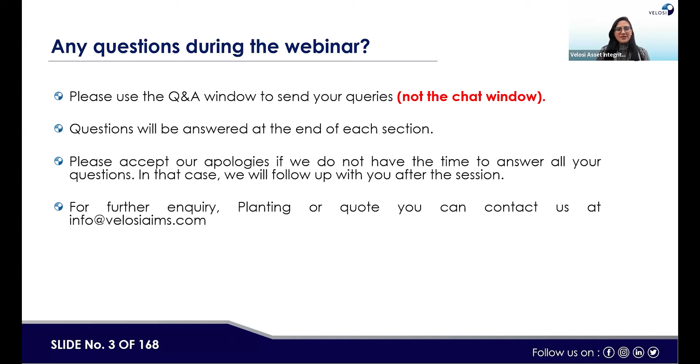Since this is a quite technical subject, we will touch only the key theoretical and practical aspects of conducting FFS and life extension study of thermal cyclic service piping system. In this limited 2 hours, we request you all to follow along with us and keep asking questions to help us make this session as engaging as possible.

So we will be covering Velosi introduction, fitness for service details, standards and regulations for this topic, case study overview, and question and answers. So let us begin, and I will start with Velosi introduction.

Velosi is a leading global consultancy firm that provides asset integrity, HSE, engineering, environmental, and software solutions to clients in oil and gas, power, and petrochemical industries around the world. We also have our in-house proprietary software, Whale Plant, which is an industry-leading SAP certified complete asset integrity software suite currently being used by oil and gas and energy giants such as ADNOC, Dragon Oil, TANAP, Emirates Nuclear, BSR, etc.

Founded in 1982 in Malaysia, Velosi Group was then acquired by Applus Spain in 2011. We have 43 plus years of experience so far, and our footprints are in more than 86 countries. So far, we have completed more than 1,300 projects with 500 plus multiple clients worldwide.

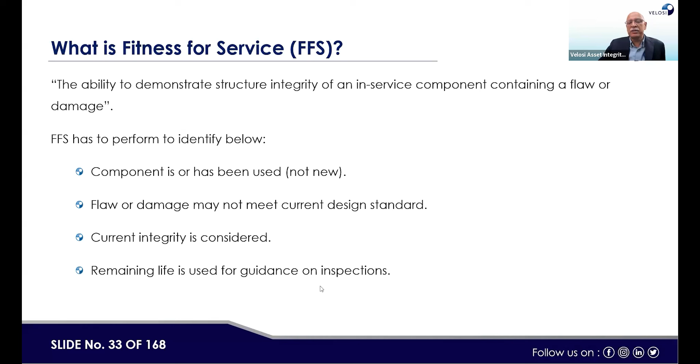So the ability to demonstrate structural integrity of an in-service component containing damage is called FFS. FFS is performed to identify that a component is or has been used, not new. Flaw or damage may not meet current design standards. Current integrity is considered, and remaining life is used for guidance on inspection, repair, or replacement decisions.

Background: this process started in 1990 with a joint industry project in America, where the first FFS guidelines were prepared. Then in 2000, the first edition of API 579 was released. In 2007, ASME and API joined hands and started working together. The third edition was published in June 2016, and the current edition being used by professionals was released in 2021.

This is just history. Now, roles of different codes and standards: API 579 does not work in isolation. All applicable design codes apply, for example ASME division 8, ASME section 8 division 1, 2 and 3, then ASME section 2, 3, 4, and 9. Similarly, ASME B31.3, B31.4, B31.8, and API 650, API 620 for tanks. So all these standards play their role, and accordingly the relevant standards are selected while making the assessment.

Then other relevant codes like inspection or corrosion standards apply, such as API 571 for identification of damage mechanisms, and API 570, API 510, API 653 for inspection and code compliance checks. Similarly, API 576 for PSVs. All these standards are required to be used while doing FFS assessment per the applicable equipment or component for which those equipments were built.

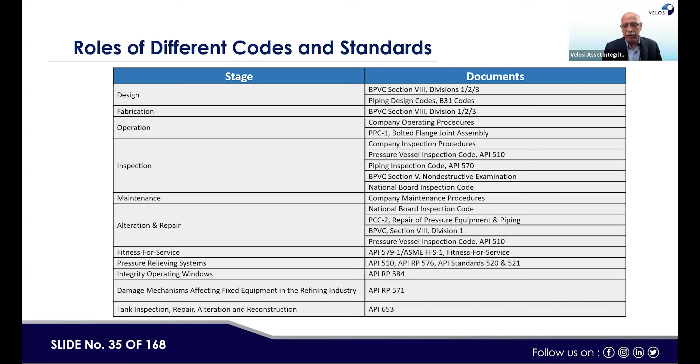Now, the objective of fitness for service assessment is to get some time so we can either repair or replace the equipment, or continue for a certain period without any action. The objective arises because equipment is found with a defect, and accordingly we do the assessment. The final outcome of FFS assessment is a decision to run as is, repair, re-rate, alter, or retire the equipment. The FFS result can also include an estimate of remnant life, useful for planning future inspection in case of continued running, and future budgeting in case of equipment retiring.

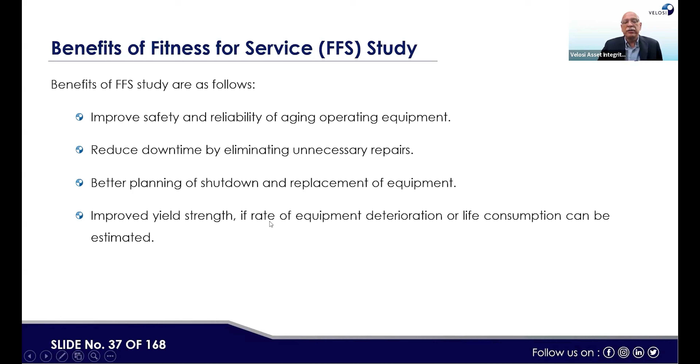Next, the benefit: previously, if equipment was not meeting the criteria of static equipment under API 510, 570, or 653, it should be removed, retired, or repaired. But since the inception of API 579, we can get some time. This ensures safety even though the equipment is in a defect situation, improves safety and reliability of aging operating equipment, reduces downtime by eliminating unnecessary repairs, enables better planning of shutdown and replacement, and allows estimation of the rate of equipment deterioration or life consumption.

Which areas or expertise are required? It is a multidisciplinary team that should be doing the FFS assessment job. For example, corrosion experts and corrosion engineers are required. Plant operational experience or operation engineers are required to be involved. Stress analysis means good mechanical engineering design; people who can do stress analysis and finite element analysis are required to participate, as well as fracture mechanics expertise. Metallurgical and material engineering knowledge is also required.

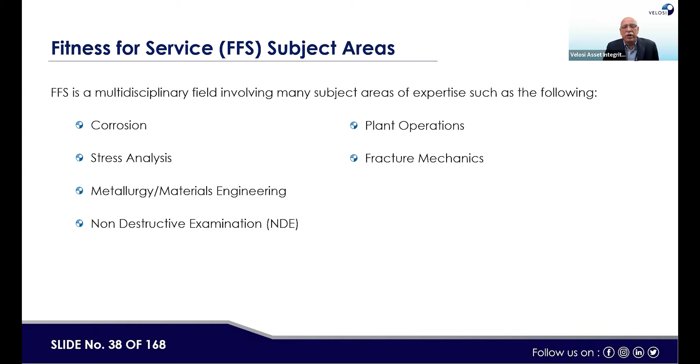Then non-destructive examination experience, NDE, like what kind of techniques are used to do defect assessment or equipment condition assessment. Just for the sake of knowledge, when we talk about API 579, this standard consists of 14 parts. Part 1 is introduction, and the last part is fatigue damage. In between, for example, brittle fracture is section number 3.

So practically part 1 and 2 are the introductory parts, and 12 parts are for various kinds of damages. For example, brittle fracture is part 3, general metal loss is part 4, localized metal loss is part 5, pitting is part 6. So 4, 5, 6 are similar kinds of damage mechanisms.

Brittle fracture mainly is like UCS 66, or low temperature service checks are done by this. Then blister, HIC and SOHIC damage is part 7, weld misalignment and shell distortions is part 8, crack-like flaws is part 9, equipment operating in creep range is basically chapter 10, fire damage is part 11, dents, gouges and dent-gouge combinations is part 12, laminations is part 13, and fatigue damage is part 14, which we will be using in today's assessment.

Then there are various annexures which provide support to the applicable parts. I'm not going through this because this is available there.

Then if we see the combination, how these parts are combined together is interesting. Brittle fracture works in combination of part 3 and 9. Corrosion and erosion issues are covered under the combination of part 4, part 5, part 6, and part 7. Then crack-like flaws are basically covered under part 9.

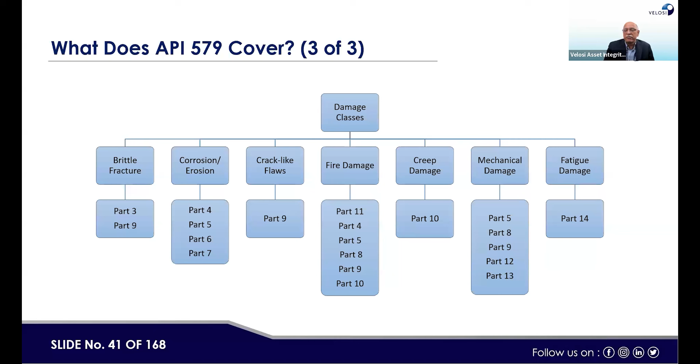Fire damage is a combination of part 11, 4, 5, 8, 9, and 10. Creep damage is part 10. Mechanical damage is part 5, 8, 9, 12, and 13. Fatigue damage is part 14 alone, and it also goes with ASME 8, division 2, fatigue and finite element analysis as well.

So now, in each chapter, there are 3 levels of assessment. Level 1 is very simple. Level 2 is moderate. And level 3 is complex and advanced, which is done with the help of finite element analysis software.

There could be any software, but it should be able to do fracture mechanics and finite element analysis or stress analysis. Whereas the simple one, level 1, is a spreadsheet. Level 2 is more than the simple one, more moderate, but it is also done via Excel spreadsheet.

So now, how do we do this? First of all, the defect is identified and its size is identified. Then we say what is the flaw and what is the cause of this flaw or damage. Then which technique can be used for the assessment of this defect, and accordingly, what is the applicability of that particular chapter or part, and what are the limitations while doing this assessment.

Then what kind of data we need - this is step 3. Then assessment technique and acceptance criteria - whether we'll be using a spreadsheet, whether we will be using software, whether it would be an elastic-plastic technique or some other technique, or a limit load technique.

Similarly, step 5 is remaining life evaluation, which is also part of the study. Remediation action, or what recommendations are required to keep the system intact, or what cautions are to be taken by the operating company. Then what kind of in-service requirements and recommendations are given, and then the report is prepared - what's called documentation. So a total of 8 steps are generally taken for any FFS assessment.

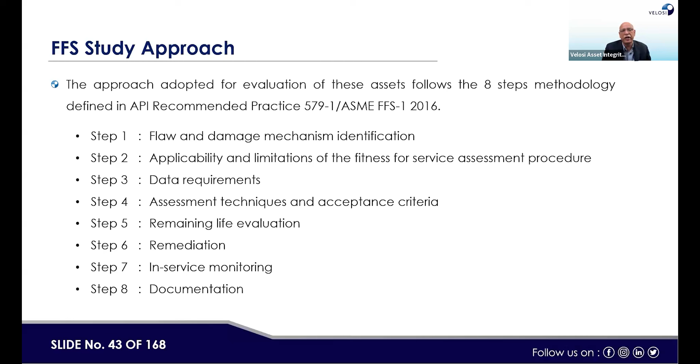Then the importance of damage mechanism - this is like we say, if some defect is created or seen in the equipment, we need to understand how this defect was caused. Like what was the damage mechanism behind it, and what could be the failure mode next to cause this equipment to fail, and what could be the consequences.

At the same time, for example, if we want to do FFS assessment for any defect, we need to first understand - the current defect growth rate should be either known or should be prevented. Unless and until the damage mechanism is kept in control or its growth rate is known, we will not be able to guarantee how long the equipment can be kept under operation without any threat of failure.

So the identification of damage mechanisms, its causes, and its prevention measures should be known to the FFS team. Then they can make proper decisions. This means that API 579, or API 571, or applicable NACE standards, or any other relevant reference should be kept in hand while doing FFS assessment.

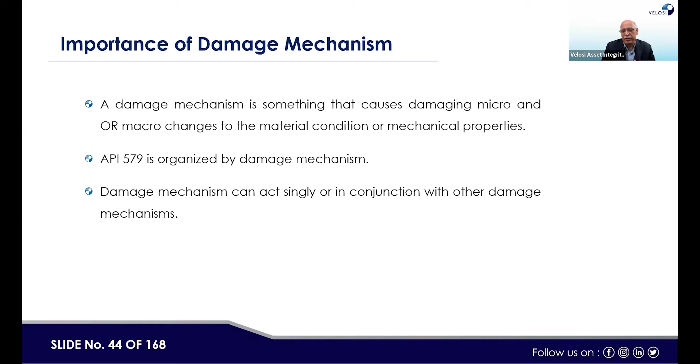Now, there are various kinds of damage mechanisms. If you want a little idea: mechanical, temperature-related, corrosion-related. What are mechanical related? For example, overload, brittle fracture, ductile tearing, deformation or buckling.

Then wear is sliding, fretting, or abrasion related damage. Then fatigue is low cycle, high cycle fatigue, thermal-mechanical fatigue, or erosion is also sometimes considered under fatigue. Then temperature-related issues mean creep rupture, deformation, microstructural degradation, temper embrittlement, over-aging, then oxidation, and so on.

Then in corrosion, low temperature corrosion and high temperature corrosion are all part of these corrosion issues. Like if you see brittle fracture, there's no deformation, but the equipment could be broken because of lack of toughness due to low temperature.

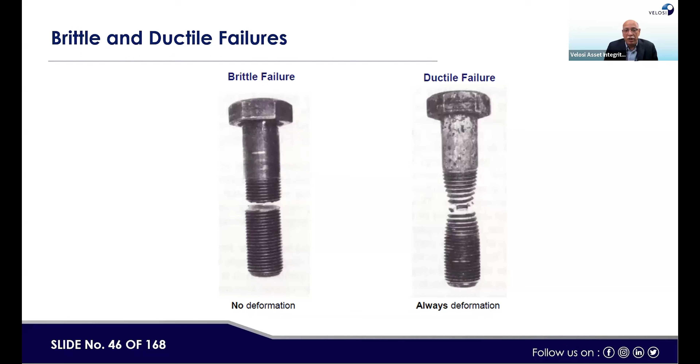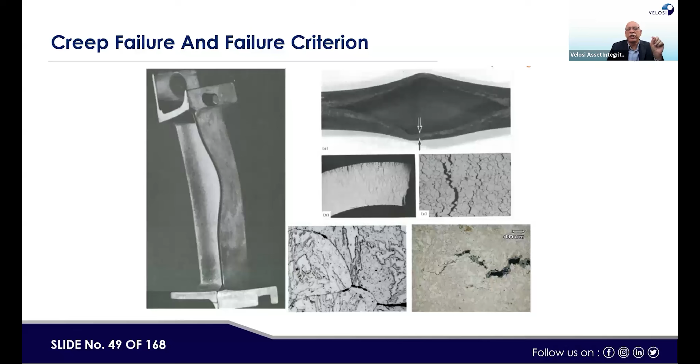Then creep failure, which is basically due to high temperature runs. If equipment, for example a fired heater or reactor tubes, is exposed to excessive temperature variations beyond its limits, it can fail due to creep or high temperature cycles. Then initiation of fatigue cracks, generally due to mechanical fatigue from thermal cycles or vibrational cycles.

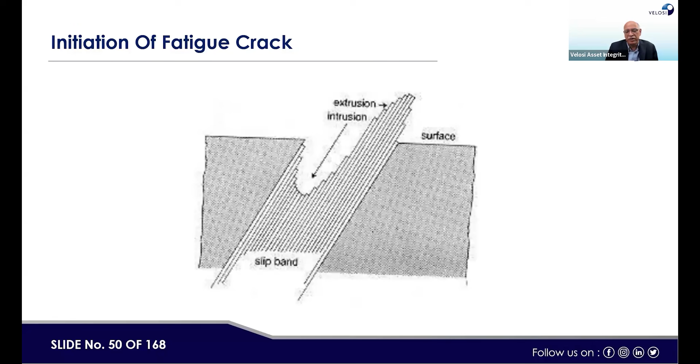Then metal loss, which is normal corrosion, can be seen by naked eye or measured by UT. Based on the metal loss recurring rate, assessment can be done. This is metal loss from pitting - if localized pitting is there, internal or external, it can also be assessed.

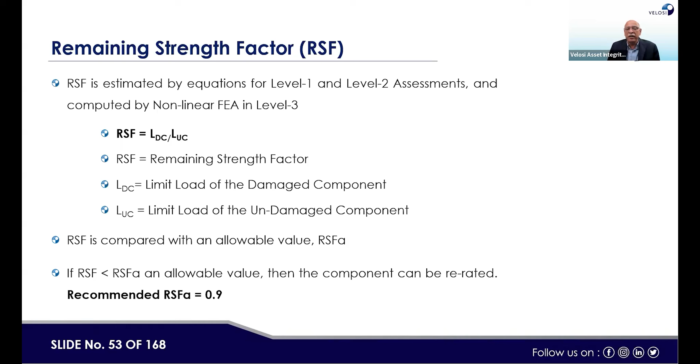Then there's an important aspect covered under FFS assessment level 1 and level 2, called RSF, remaining strength factor, which is LDC over LUC. LDC is limit load of the damaged equipment, LUC is limit load of the undamaged equipment. If RSF is greater than 0.9, equipment can be considered fit. If less than 0.9, it is considered not fit or equipment has to be re-rated.

From an application point of view, on which kind of equipment or geometrical shape FFS-579 can be used: cylindrical, spherical, formed heads, pipe bends - usually classified as primary equipment, these are type A components. Then type B components like nozzles, piping systems, reinforced zones of conical transitions, integral tube sheet connections, flanges, cylinder to flat head junctions, usually classified as secondary components.

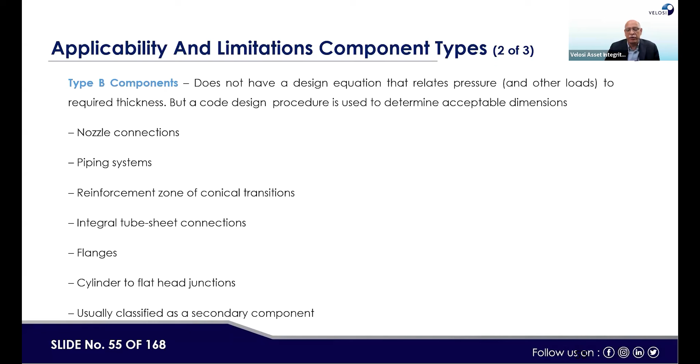Then type C components - these do not have a design equation, so no pressure equation can be used and thickness cannot be calculated, nor can code design be applied. For example, pressure vessel head to shell junctions, stiffening rings attached to the shell, skirt and lug type supports on the pressure vessel, tank shell courses to tank bottom junctions.

So here we have to use some other empirical equation for the FFS aspects - we have to keep this in mind. API 579 is applied only on the pressure containing part. Non-pressure containing parts like structures are considered not applicable for API 579.

Then applicability and limitation of level 1 and level 2 procedures: the original design criteria was in accordance with a recognized code or standard. The region of metal loss has relatively smooth contours without notches and is away from structural discontinuities. What is structural discontinuity? From any particular nozzle, from any major T-joint, or wherever structural discontinuity occurs - this defect should be away from such areas.

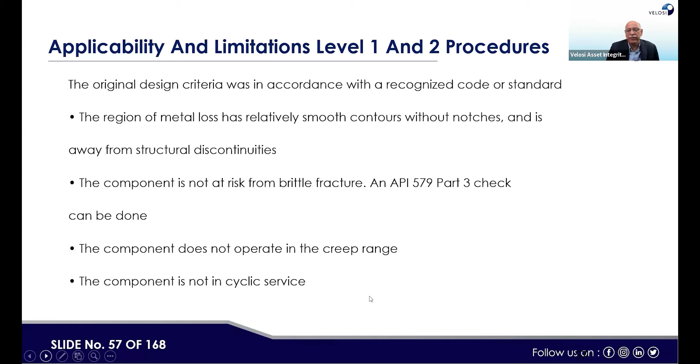For 579, if there is structural discontinuity nearby, or cyclic service, or secondary stresses coming on the equipment, then level 1 and level 2 normally cannot be applied. The region should be away from structural discontinuity, the component should not be at risk from brittle fracture (API 579 part 3 check can be done), the component should not operate in the creep range of temperature, and should not be in cyclic service - these are the limitations where level 1 and level 2 do not work.

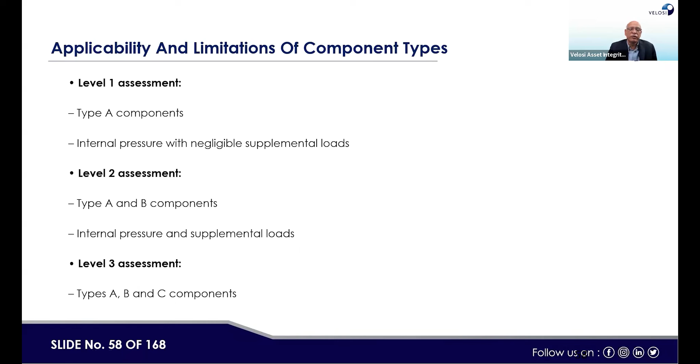Level 1 normally applies to type A components with internal pressure and negligible supplementary loads. Level 2 assessment covers type A and B components with internal pressure and supplementary loads. Type A, B, and C components, all kinds of conditions, can be covered under level 3, because it is finite element analysis based, with a lot of calculations done based on applicable empirical equations.

So now what kind of data do we normally need? Original equipment design - like the data sheet, design calculations - we need that. Then equipment inspection and maintenance history. We also need, if a defect is there, its size and dimensions.

And then if there has been any kind of risk assessment like RBI done, or previous corrosion study or RCA report results, those can all be used as good reference data for the FFS assessment. Here you can see one example of a defect where metal loss is shown outside - the grid is shown: pressure vessel shell, inspection grid, metal loss.

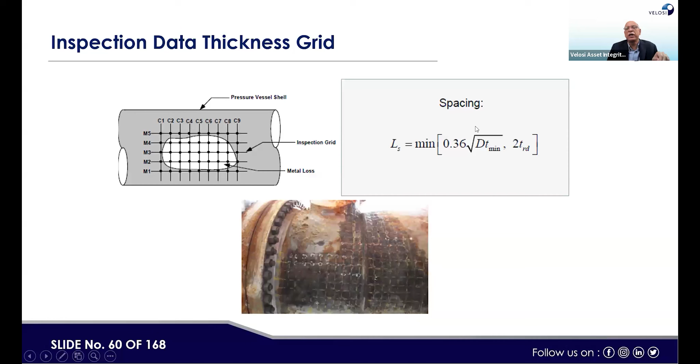So in all these boxes, metal loss is not equal. Maybe in the middle there is the highest metal loss, and in the edge there could be less metal loss. That's why this equipment is divided into cells, and each cell is given the thickness which is the average thickness of that part, keeping the worst metal loss there. Accordingly, there's a spacing, and assessment is done based on these calculations.

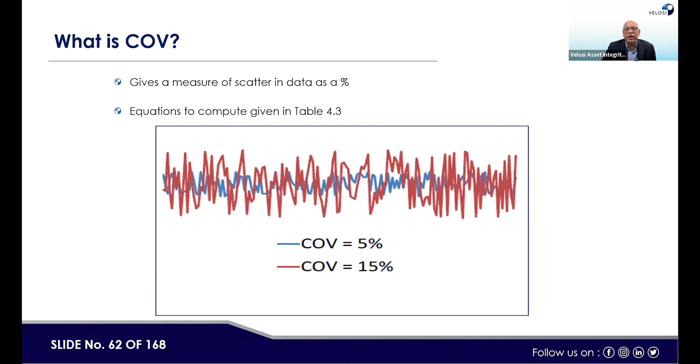This method should be applied if metal loss is general, minimum of 15 readings required. Coefficient of variation could be less than 10%. COV gives a measure of scatter in data as a percentage. The equation to compute is given in table 4.3 in the standard, and it can range from 5% to 15%.

So RSF equation - for example level 1 and level 2 calculation - if FCA, it's basically applicable for type A equipment, and then level 2 also, the ratio wise. Level 1 assessment acceptance criteria and level 2 assessment acceptance criteria involve a little more calculation, but result wise it can give you the comparison. RSF in both cases should be greater than 0.9.

Average measured thickness from the critical thickness profile, or average measured thickness from the point thickness reading, both can be used. But in both cases there should be some FCA available. T measured minus FCA should be greater than or equal to T minimum required. The equation is the same - whatever the minimum measured thickness is at the defect location, that should be greater than the T minimum required by the calculations, minus FCA. FCA means future corrosion allowance.

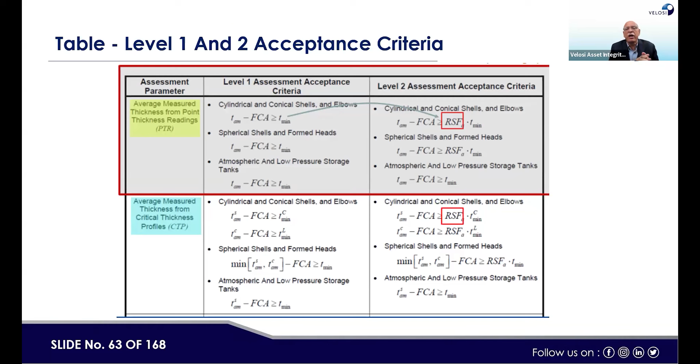For example, if there could still be an active damage mechanism, some metal loss would be taking place. So how much time would be available for that particular metal loss or corrosion rate?

So there are various softwares which can be used. We are not promoting any - you can use any. Excel spreadsheet for level 1 and 2 are good enough, but we have also used PV Elite that can help you do the calculation. Signal FFS software is also there, and Codeware Compress software is also there. These are for level 1 and 2. For level 3, there is ANSYS, or other softwares can be used.

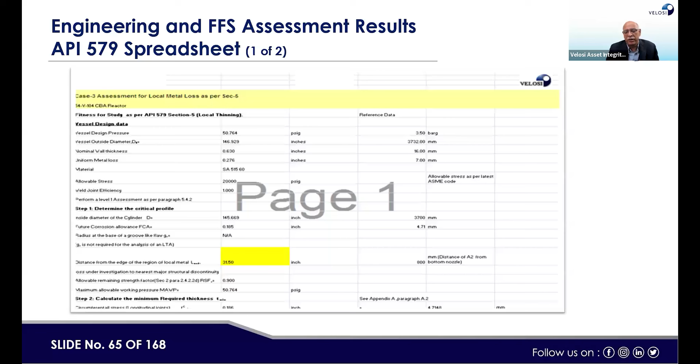So this is like a spreadsheet - I'm just showing we have a spreadsheet with all the calculation for level 1. And then it could also go to level 2, but I cannot go through all these components. The Excel spreadsheet is available and we have been using it.

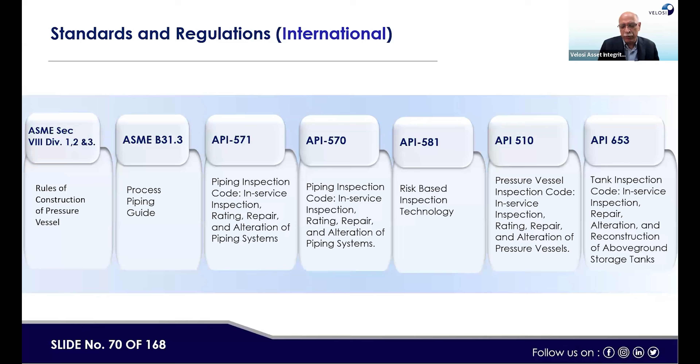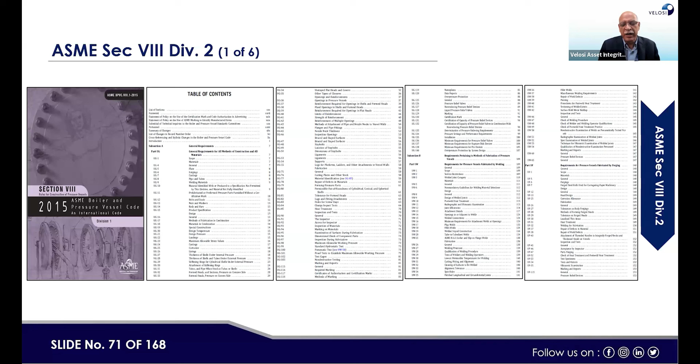Like this one, if you see, is ASME Section 8 Division 2 - I'm showing 2015, but it could be a later standard. My slide is older, so I apologize for that - there could be a new standard. So this is another slide showing a different content list of the ASME Section 8 Division 2 standard, not just one big title.

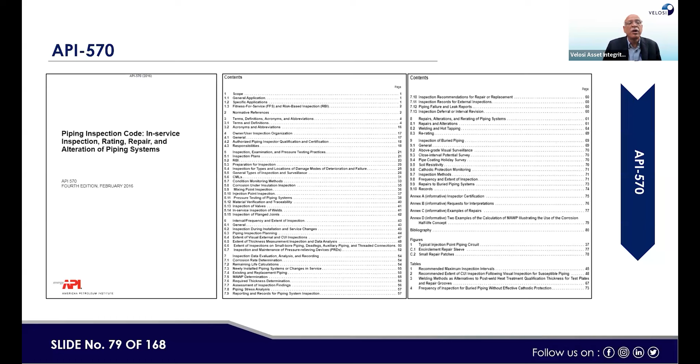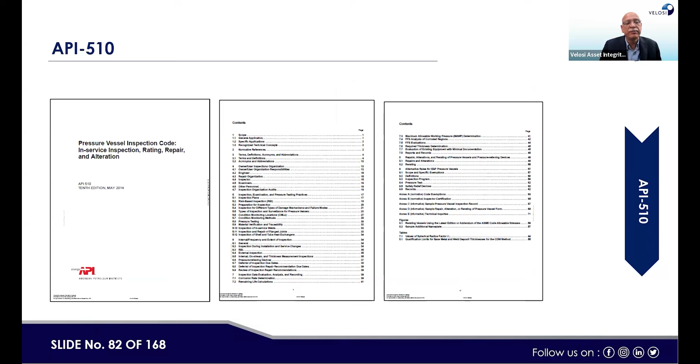ASME B31.3 covers content for piping systems. API 570 is the piping inspection code for in-service inspection, rating, re-rating, repair, and alteration of piping systems. API 571 covers damage mechanisms affecting fixed equipment in the refinery industry. Risk-based inspection is API 580 and 581. API 510 is for pressure vessel inspection, in-service inspection, re-rating, repair, and alterations. Tank inspection, repair, alteration, and reconstruction is API RP 653.

So a question, just to check if we have some idea about these standards: which code is used for inspection, guideline, and code compliance checking of piping systems? The answer options are A, API 570; B, API 579; C, API 510; and D, API 653. Answers are coming in mostly right.

It is A, API 570, for piping inspection and inspection related guidelines.

So now we have completed almost half of the part where introduction of FFS, its techniques, approach, and what we achieve. Now I will be proceeding towards the case study. Then a question and answer session, which would be live, will give you a chance to ask questions by speaking into Zoom. That would be the last stage.

So now I start with the FFS case study. This case study we are presenting today is a more complex one, and this FFS study is done by using Caesar 2 software, stress analysis software, and fatigue analysis software. So it is sometimes a special case, thinking how we can use that. Let me go through the part.

To perform stress analysis by using Caesar 2, determine the cyclic load of piping components. The code compliance of piping under its original design condition is checked, including stress levels and flexibility requirements. Then to perform FFS assessment as per API 579 in order to check the operational safety and integrity of plant.

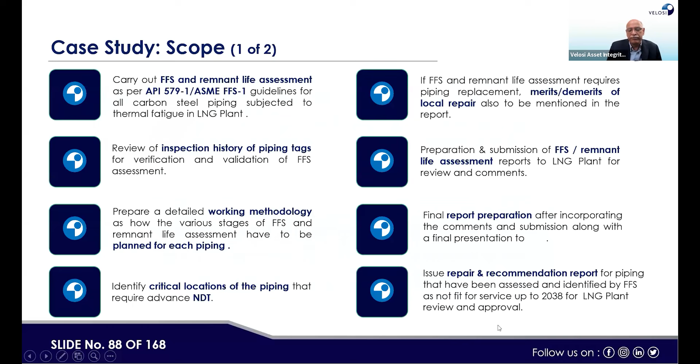So here, the client awarded a project to Velosi to perform FFS for plant 3.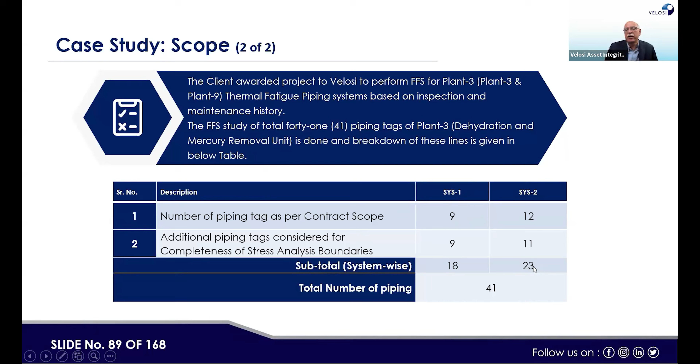So we were required to deliver FFS assessment report for feed gas inlet and outlet piping system of the gas treatment unit, and FFS assessment report for raw liquid inlet and outlet piping system of the LPG treatment unit.

Then detailed deliverables: collection and review of engineering, operating and historical records; identification of applicable damage mechanisms; marking of isometrics for execution of field NDT inspections, with field inspections also supervised. Then remnant life assessment in accordance with API 570 requirement, identification of peak stress locations and failure points by performing stress analysis, then fitness for service assessment by fatigue analysis using the same Caesar 2 software.

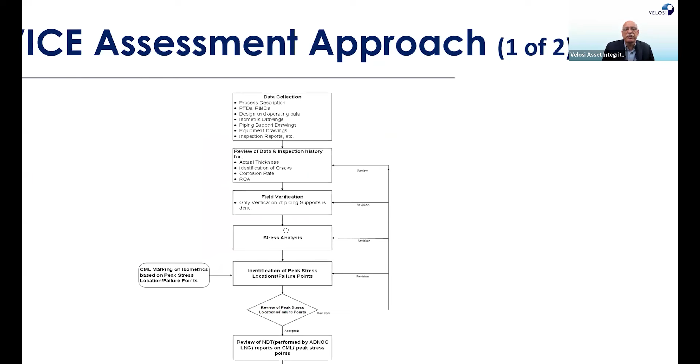So this is the technique, the same step which we explained. Here, data collection, then review of the data, inspection history, field verification, then stress analysis, then fatigue analysis. So by all this calculation, we reach to the final FFS results.

The same steps which we show in the flow chart: collection and review of the engineering, operating and historical records, marking of isometrics for execution of field NDT inspection and execution of the field inspections, remnant life assessment in accordance with API 570. Some repetition is coming in my presentation, sorry for it.

But fitness for service assessment level 3, for example, identification of applicable damage mechanisms, identification of peak stress locations, failure points by performing stress analysis. Then it is done, basically not pending.

Stress analysis for as-built condition or as a new plant, then stress analysis for 25-year design life with 11,863 cycles, stress analysis for 29 years design life with 13,000 cycles, then stress analysis for 49 years design life with 22,000 cycles. Number of cycles calculation is also done based on the operation mechanism or scenario of the particular plant.

Then assessment of remnant fatigue life as per API 579, preparation of finding and recommendation. So these are the basic steps. Basic data required is the same we collected: PFDs, P&IDs, isometrics, historical data, plant operating data, NDT data.

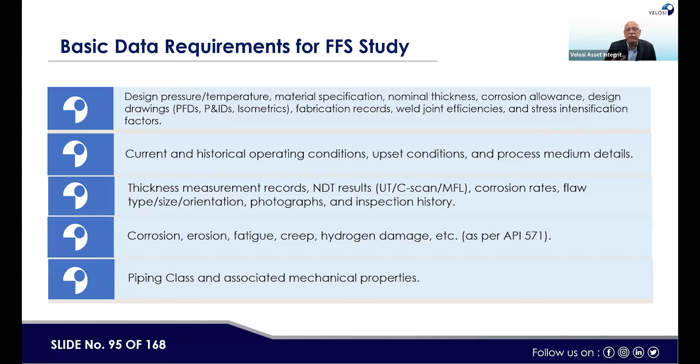We also collected their previous RBI assessment results with the identified corrosion loops. Then, what was the process basically?

It is LPG going through to remove water, adsorption process, and after a certain period, the system requires regeneration because the adsorption kettle, a bed, may already reach a point where it cannot adsorb more water. So then at that stage, the process shifts to train 2 or equipment B, adsorption tower B.

Under that process, this first adsorption tower will go under depressurization, and then we have to regenerate the catalyst bed to be more active, and then after regeneration, which is high temperature, then we have to repressurize the system again. So in this way, the system goes through cycles, and this cycle was being completed in almost 12 hours.

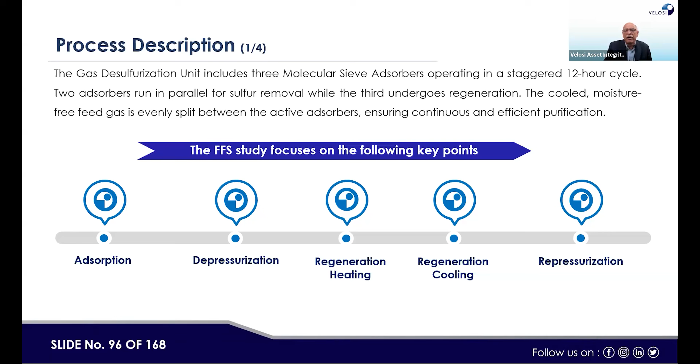Adsorption process takes place between 20 to 30 degrees Celsius. Then depressurization also takes place between 10 to 20 degrees Celsius because the temperature drops when depressurization takes place. Then the regeneration, where high temperature gases are passed through the activation bed to activate the bed, 270 to 435 degrees Celsius. And then regeneration cooling is done down to 20-30.

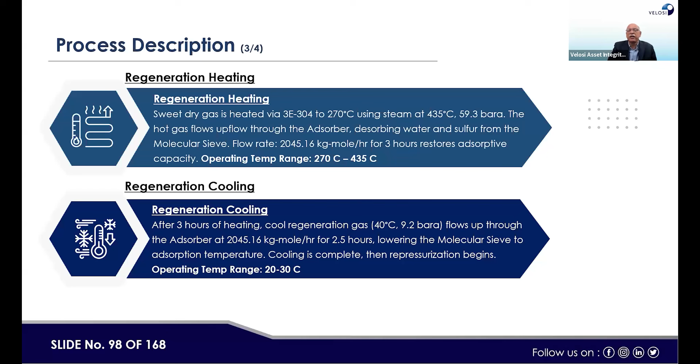So it means there is a lot of variation of temperature, which is causing a lot of thermal expansion and contraction in the piping system, which causes these cyclic loads on the piping systems. Then repressurization means the system goes again to operation. So here, one complete cycle is not 12 hours, it's 18 hours.

Therefore, 1.3 fatigue cycles are completed in a single day, and a total of 13,760 cycles are considered for the last 29 years of operations. Here, inspection history finding: the facilities were installed in 1990.

Then we got the inspection data, like visual inspection, UT, DPT, thermography, PRT - all kinds of inspection results are taken, collected, reviewed. And the kinds of defects which were there also, for example, heavy pitting, metal loss from CUI, coating deterioration, external corrosion, vibration fatigue cracks are also could be one of the troublemakers.

Repair replacement: 16 piping tags since 1990 were either repaired or replaced. Then full replacement of 7 lines from 2009 to 2013. Then sectional branch replacement of 9 lines in 2011, 2013 and 2017. So all this history was reviewed.

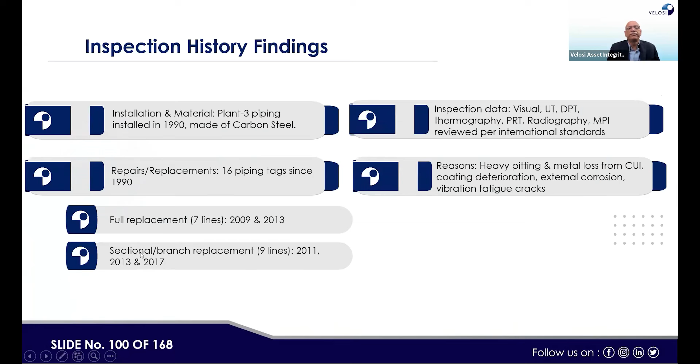Then visual inspection results, like what kind of troubles are there. CUI related issues were seen a lot, and then there were certain issues on the piping supports because of high thermal movements, and those were also being kept in good shape, but there were indications some problems were caused by the thermal movements of the piping system on the piping support side as well.

Since there's a high temperature to low temperature cyclic service, CUI is a problem, and then in some places caging was also done to remove the CUI problems.

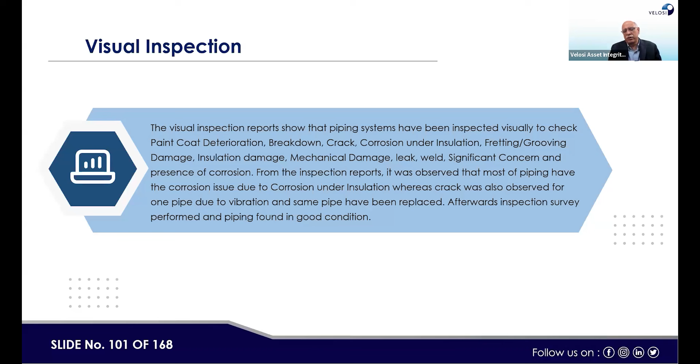Here, like the thickness measurement records, we found that for 10 lines there was no metal loss, but 26 lines show metal loss ranging from 0.01 to 2.37 mm, basically from like 0.26 to 27.8% metal loss.

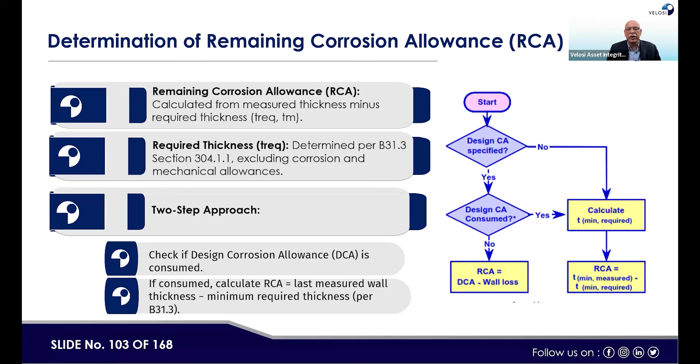Then remnant life, we have followed the mechanism of API 570. Here, we start with the metal loss, then what is the remaining corrosion allowance, and then what is the measured corrosion rate, short term and long term. Then accordingly, RLA is calculated. Then corrosion rate calculation wise: inspection, review, metal loss, then is it short term corrosion rate or long term corrosion rate.

We also compare it with the expected corrosion rate, estimated corrosion rate, design corrosion rate, and measured corrosion rate. These corrosion rates are compared, and accordingly, on a short-term and long-term basis, we see what is the worst corrosion rate that can be used. But the preferable corrosion rate is the measured corrosion rate, based on both long-term and short-term comparisons.

For corrosion rate measurement, there is long-term corrosion rate and short-term corrosion rate. Formula-wise, measured corrosion rate uses the second-last inspection minus T measured, and the date and time period during that. So depending on whether we are taking two inspections or an interval from the last inspection to startup, that gives the long-term rate. The metal loss between two inspections divided by the duration between them is called the short-term corrosion rate.

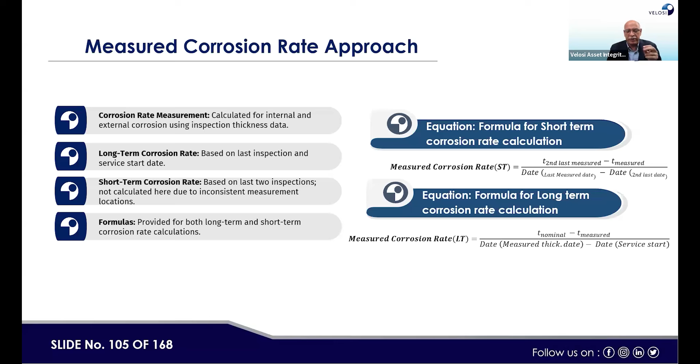Then how we calculate the remnant life: T measured minus T required, divided by measured corrosion rate. Accordingly we can see what is the remnant life of the equipment.

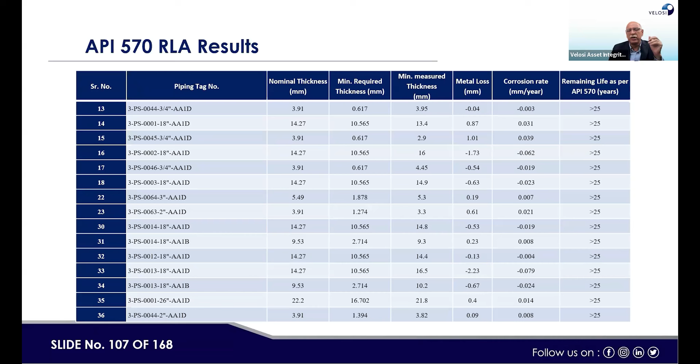Here the results are shown, but all calculations are not shown. For most of the piping system, we show nominal thickness, minimum required thickness, minimum measured thickness, metal loss, corrosion rate, and accordingly remnant life. The remnant life of all piping systems was greater than 25 years on the linear rate basis. Here we are talking about metal loss related remnant life, not thermal cyclic related remnant life. It was found within acceptable range, because wherever defects were, those pipes were already replaced or repaired by the client.

Now, before I go further, a question to keep you alert and involved. What is measured corrosion rate? Wake up, all gentlemen and ladies. And what is the question? How would you answer: what is measured corrosion rate?

Option A: the corrosion rate which is calculated with the help of an empirical equation. B: the rate at which metal reacts with oxygen in the presence of heat, calculated as corrosion rate equals exposure time and weight of sample. C: the rate at which metal thickness is lost over time, typically calculated from thickness measurements, corrosion rate equals delta T over delta T, net metal loss divided by time. D: the rate of metal production during refining, calculated from chemical recovery.

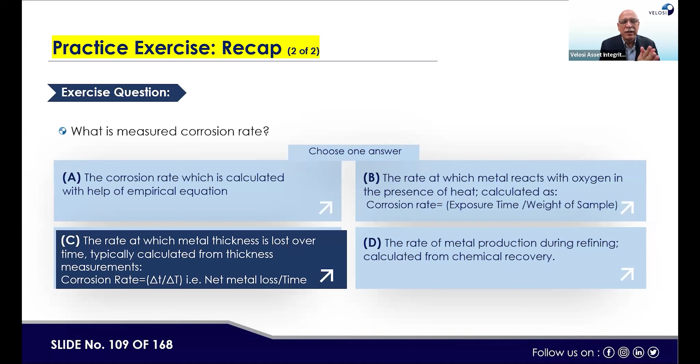The correct answer is C. These questions are being added so I can get you involved, since we are not asking questions in between. So at least you can see yourself involved with what is being presented.

Now the FFS approach, which is a level 3 assessment. We have done an API 570 assessment where the equipment is fit for 25 years, but we don't know if, thermal-cycle-wise, we can continue with these piping systems because they already completed their design life. So here the approach adopted for evaluation of these assets follows the 8-step methodology defined in API 579 level 3: flaw and damage mechanism identification, applicability and limitations of the fitness for service assessment procedure, data requirement, assessment technique, acceptance criteria and results, remaining life evaluation, remediation covered under recommendations, in-service monitoring recommendations also covered in recommendations, and then documentation.

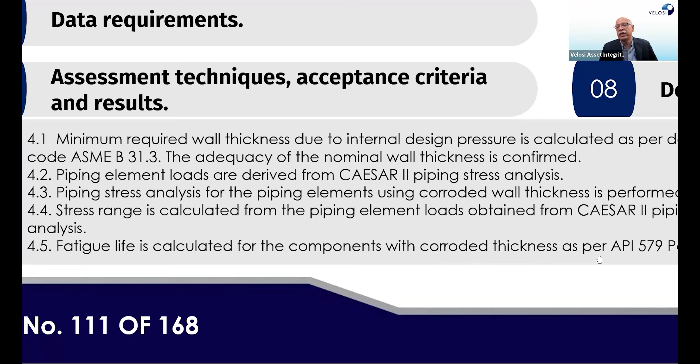First we check minimum required thickness as per B31.3, which is already done. Piping element loads are derived from Caesar II piping stress analysis. This is a 5-step process under assessment technique and acceptance criteria, very important to keep in mind. Piping stress analysis for piping elements using corroded wall thickness is performed, and the stress analysis is also done as new piping. The stress range is calculated from the piping element loads obtained from Caesar II. Then fatigue life is calculated from the component with corroded thickness as per API 579 Part 14.

So now we have done two cases basically. Assessment of fatigue damage life as per API 579 Part 14 with nominal thickness, no metal loss, but operational life is considered in the objective. Then assessment of fatigue damage life with minimum measured thickness, as per the as-found condition of the piping system.

Step 1 is damage mechanism identification. Here the main damage mechanism is thermal fatigue, resulting from repeated temperature cycling, leading to cracking due to thermal stress, because this thermal fatigue can cause cracks in the piping system which will lead to failure.

Other damage mechanisms which could be assessed under API 570, that was CUI and atmospheric corrosion as well. These two damage mechanisms were taken care of by the client, and wherever there was a defect, the pipes have been repaired or replaced.

But this damage mechanism is unseen, with no evidence on the piping, such as a crack, but this has to be assessed - how much cyclic life is left for this piping system, whether the client would be able to operate it up to year 2038. Remember, this plant was installed in 1990, so we are talking about almost 50 years of operating life.

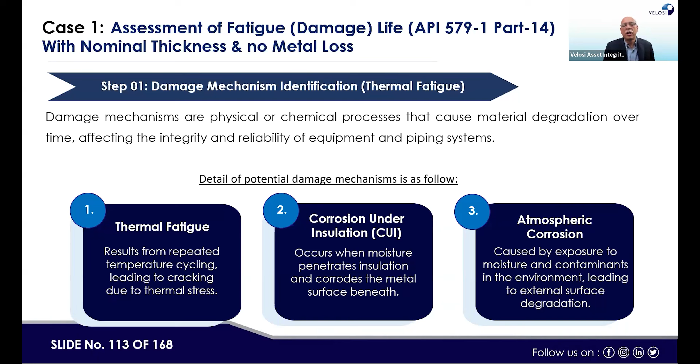From an application point of view, we are using API 579 Part 14, Level 3 assessment, Method C, under cyclic operating conditions. The Level 3 assessment procedure is consistent with modern fatigue analysis methods employed in numerical fatigue evaluation and durability software, designed to post-process results directly from a finite element analysis.

This fitness for service assessment procedure is for evaluating fatigue life of components subject to cyclic service below the creep range that do not contain crack-like flaws. The application covers complex geometry components subject to complicated transient loading from pressure and thermal effects, where post-processing of results from a finite element analysis is desired.

Components subject to non-proportional loading - the component is subject to loading where the sequence of loads may have an effect on the fatigue life. The component may contain volumetric flaws such as thinning, pitting damage, and weld misalignment.

Limitation: the assessment procedure only applies to components that are not operating in the creep range. The component may contain volumetric damage from general thinning, local thinning, pitting, or weld damage, but does not contain a crack-like flaw, and does not contain stepwise cracking or SOHIC damage.

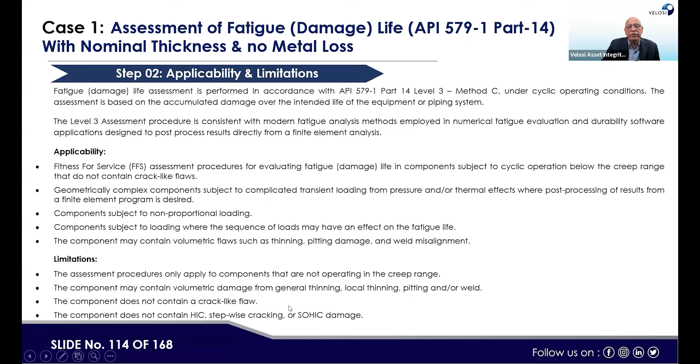This is very important when doing this assessment. The data requirements we collected include PFDs, P&IDs, isometric drawings, inspection history data, process description, piping class and related data - this is important to collect.

Step 4: assessment technique and acceptance criteria. Here we have used API 579, considering overall integrity of the assessment - the piping is assessed using Caesar II software from Hexagon, and Excel spreadsheets are also used. Fatigue damage assessment is performed in accordance with API 579 Part 14, Level 3, Method C.

Assessment is based on accumulated damage over the intended life of the equipment. In the current study, total life is considered from installation in 1990 until the current expected retirement target of 2038. The results show 22,776 cumulative duty cycles. For a successful assessment, the cumulative damage for the entire number of duty cycles should be less than 1.

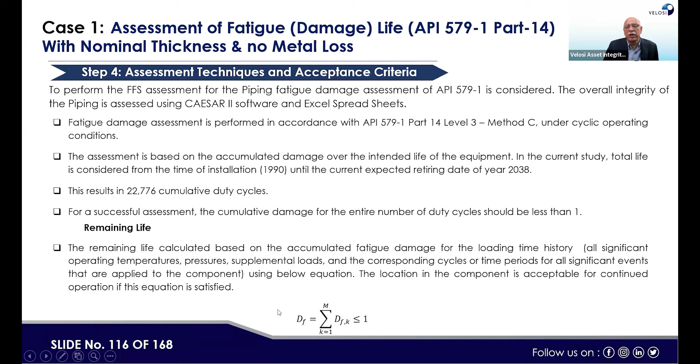Next, the remaining life is calculated based on formulas where we accumulate the results. Now, under Caesar II, how do we do that? Assessment of a system via Caesar II involves input parameters in Caesar II: load cases, operating cycles, stress analysis results, and then fatigue analysis results. Now we are going into the Caesar II criteria.

Since we are not presenting Caesar II as a demonstration, this is an input screen which has also been modified. We have an input screen, and then this is the model where the complete piping system is modeled as per actual isometrics and support locations, with all connected nozzles and anchor or guide locations as well.

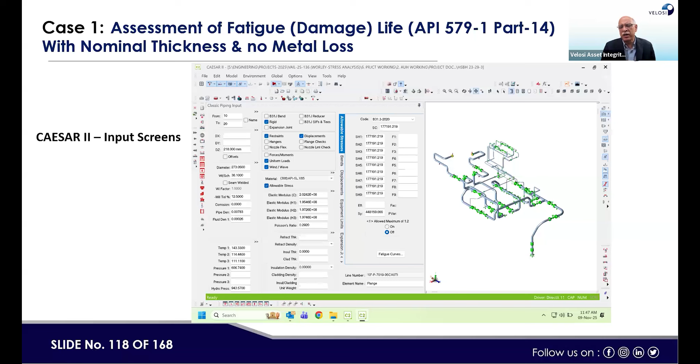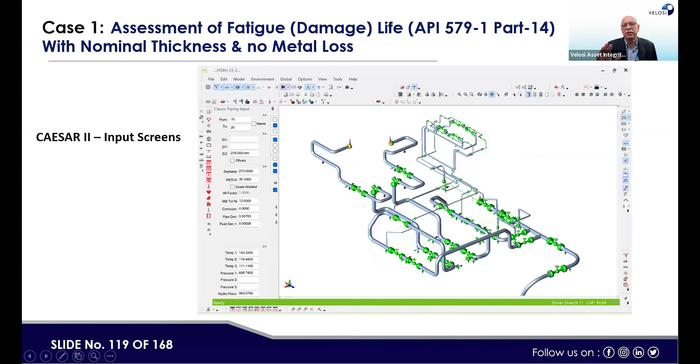The previous one shows more data, and here on the right side you can see a more practical view of the piping network. So here, for assessment, there are various systems - we are showing you only one piping system.

The data we used includes the diameters of the pipe - 1/4 to 1½ inch, 2 inch to 10 inch, 12 inch to 24 inch, and 26 inch to 30 inch - and their respective thicknesses, and this is the material of construction. Then this is the corrosion allowance, the piping class, piping material, nominal diameters, pipe schedule used, and the corrosion allowance also.

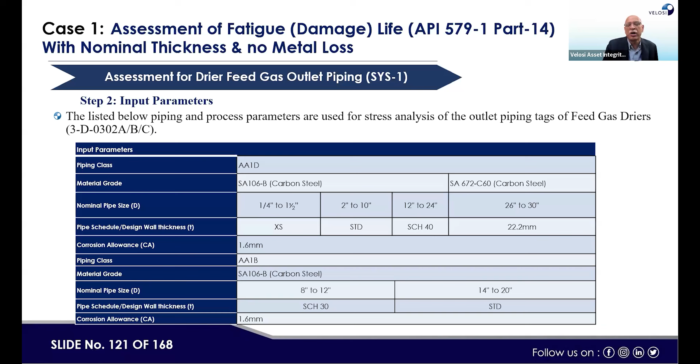So this is the data which is used as an input to Caesar 2 along with the operating and design conditions. While the model is completed, we run various cases, showing how the various load combinations are used to run the analysis in Caesar 2. Total 125 load cases were developed and analyzed, but we are showing you only a few cases as a sample.

Load case developed for the modeling. Then like operating cycles, what we basically considered, that is how much time, how we calculated the time for the total cycle completion for this drying process.

The molecular sieve gas desulfurization unit consists of 3 adsorber tags: 2 in parallel adsorption and 1 in regeneration. The unit operates on a 12 hour adsorption cycle, 6 plus 6 hours. Then 6 temperature and pressure conditions are considered to reflect different conditions of adsorption and regeneration between feed gas dryer A, B, C. The adsorption and regeneration process of the feed gas dryer is illustrated in the next slide.

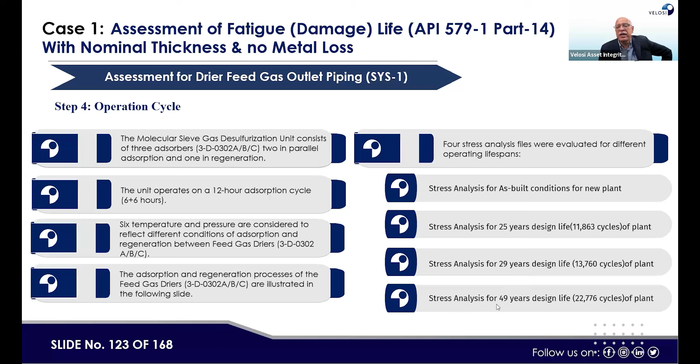For example, 4 stress analysis files were evaluated for different operating lifespans: stress analysis for as-built condition, stress analysis for 25-year design life, stress analysis for 29 years design life, and stress analysis for 49 years design life, where different numbers of cycles are identified.

And now stress analysis results. Now we are showing you where the maximum stress was resulted or reported by Caesar 2.

This is the case we are showing you: assessment of the piping fatigue life with nominal thickness and no metal loss. This is as new. Now, next would be stress at node number 7010 or 1650. Here, stress ratio is 98.7 or 89.5 percent, right?

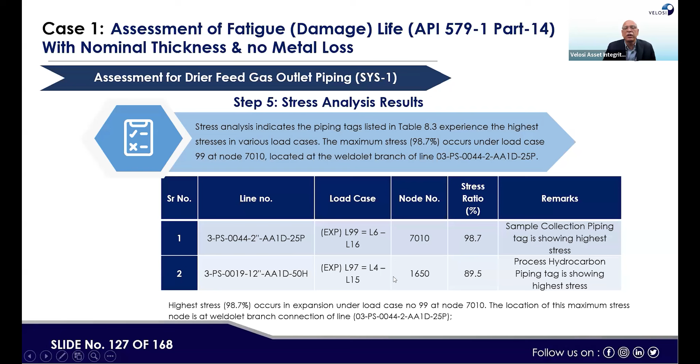So the sample collection piping tag is showing highest stress. Process hydrocarbon piping tag is showing highest stress. These are the locations where stress was reported on the higher side. If you see, this is the piping along with the big pipe, there was a small pipe. Where this small pipe area was under high stress, you can see that if a small bore connection is connected with a big pipe, that could be subject to fatigue stress and it may fail.

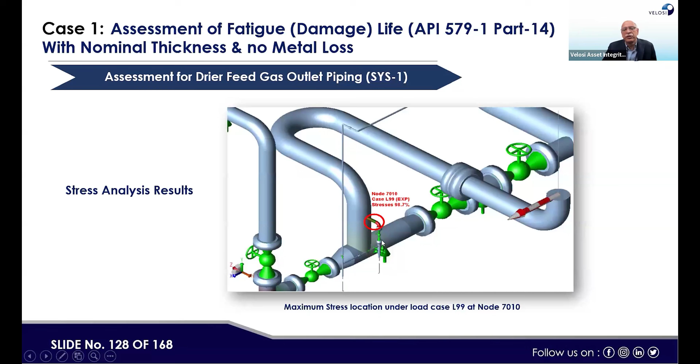So the first thing is stress analysis by Caesar 2, which shows the stress ratio, and high stress points can be seen, and then focus can be given to those points. Those points may become a weak point or at some stage may fail.

Remember, the metal loss-wise, these pipes are already safe. Now we have checked as per the number of cycles, and this number of cycles assessment and fatigue analysis both are also showing the piping is safe to keep in service till 2038 as per the target of the client.

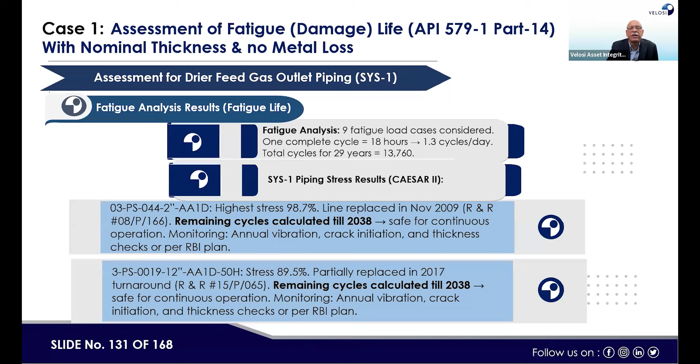So now if you see that, now case 2 we are starting, where 2 piping systems we're taking as a sample, and here we will be analyzing these piping systems as per their minimum measured thicknesses, right? The previous one was done as per the nominal thickness. Now we are doing it as per the minimum measured thickness.

So the steps again: minimum wall thickness for internal pressure calculated for ASME B31.3 Appendix 2, and adequacy confirmed. Then piping load obtained from CAESAR II stress analysis. Then stress analysis performed using corroded wall thickness. Stress ranges derived from Caesar and applicable loads.

Fatigue life calculated for corroded component as per API 579 Part 14.

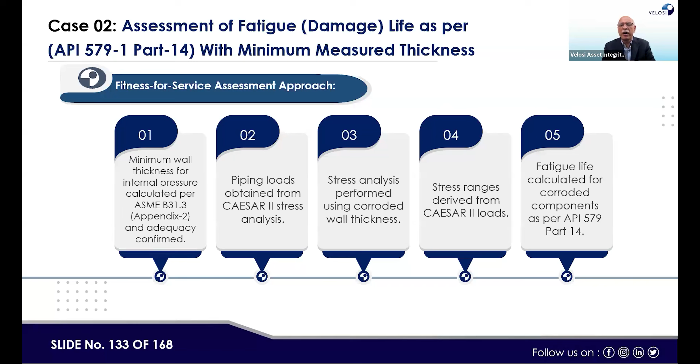This is the basis of the history, where we have taken the history of this piping tag. During piping stress analysis, high stress is found at node 7010 with this piping tag number, as shown in figure 8.7. According to the inspection report of year 2021, the minimum measured thickness is 3.82 mm at node 7010, and its nominal thickness is 3.91.

Some metal loss was there. The full length replacement of this line has been done in the year 2009. So we have considered a corrosion rate of 0.0075 mm per year based on the long-term corrosion rate, and the same corrosion rate has been used in the thermal fatigue assessment.

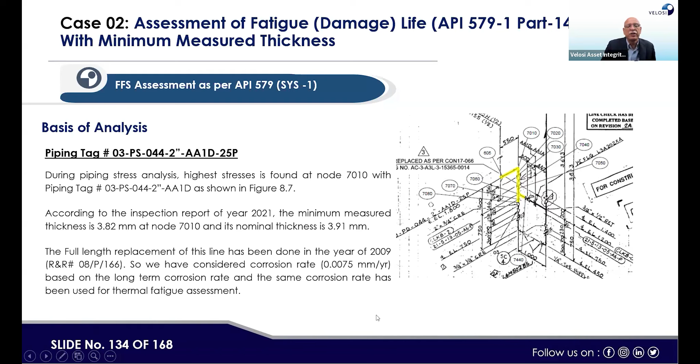Similarly, other piping tag, similar history. We have taken the corrosion rate of 0.02 mm per year. Now, the calculation of the minimum required thickness is done as per T equals PD over 2SE plus PY, as per the ASME B31.3 formula. So here, the remaining corrosion allowance available still exceeds the original corrosion allowance of 1.6 mm.

Based on the result obtained from thickness calculations, it is concluded that the measured wall thickness is still more than the required wall thickness. Calculation covers hoop stress under internal pressure. Adequacy for thermal cyclic loading is addressed in the next section.

Now we are going to thermal expansion stresses for the corroded piping component. Element forces and piping sectional properties are calculated using corroded wall thickness; stresses, axial, bending, torsional, calculated per ASME B31.3 clause 319.4.4. Then stress intensification factor SIF is applied for elbows and tees as per ASME B31.3 Appendix D and B31J.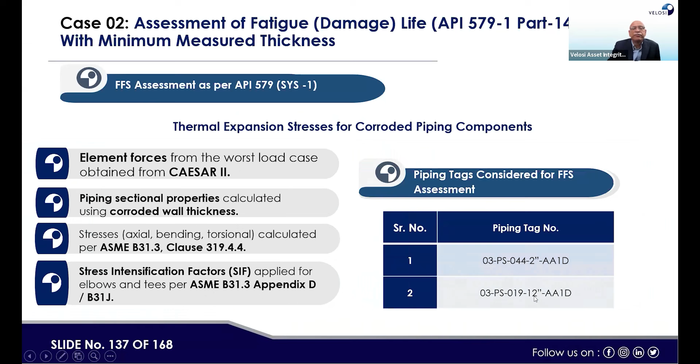Here, the piping tag considered for FFS assessment again, we continue with node 7010 piping tag. What we checked here: forces and moments for the worst load case taken from Caesar II, piping sectional properties calculated using corroded wall thickness. Code stresses of the corroded component are within allowable limit except at node 605 and 7010. Maximum stress ratio at node 7010 observed. Stresses calculated using current thickness minus design corrosion allowance.

Remaining fatigue life is sufficient for continued operation till 2038. Conclusion: piping tag is fit for service until 2038, based on stress and thermal fatigue analysis. This is the result basically.

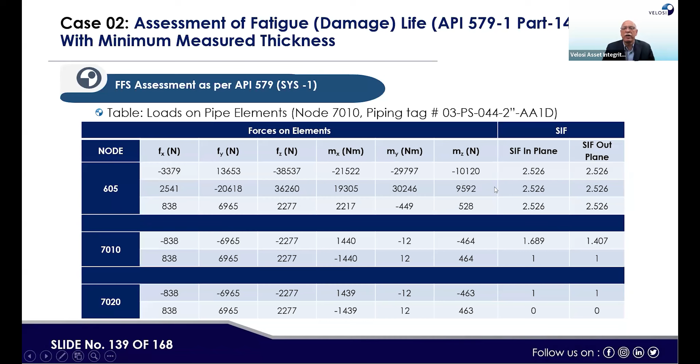Now if we see here, the table of loads for piping elements at node 7010, this piping tag number, you can see the various loads, like SIF, for example 2.52, and the stress ratio wise shows more or less the same, and these are the moments and the forces.

Now node 1650, this piping tag number: forces and moments for the worst load case taken from Caesar II, piping sectional properties calculated using corroded wall thickness. Code stresses are within allowable limits except at node 1650, where maximum stress ratio is observed. Stress is calculated using current thickness minus design corrosion allowance. Remaining fatigue life sufficient for continued operation till 2038. Conclusion: piping tag is fit for service till 2038.

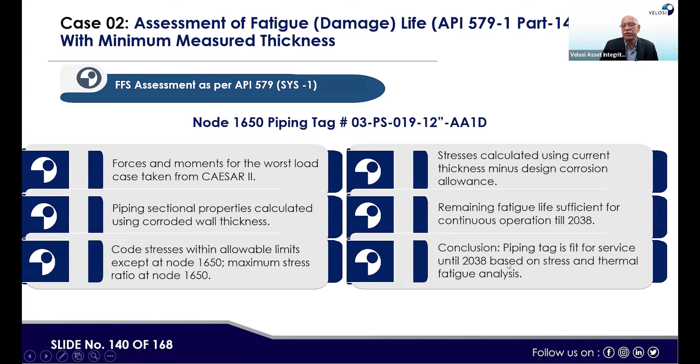Now, for the same tag, there is a SIF ratio, and the moments and forces which would be used for the equipment nozzle design and its subsequent impacts.

Calculated stresses for corroded pipe: if you see the ratio, 38.76 is quite low, but in one area the ratio is exceeding, like 111.21% for node 1650, and also 99.51 in the same area with different combinations. So since this has been identified, it has to be either monitored or some corrective action has to be taken for this particular node.

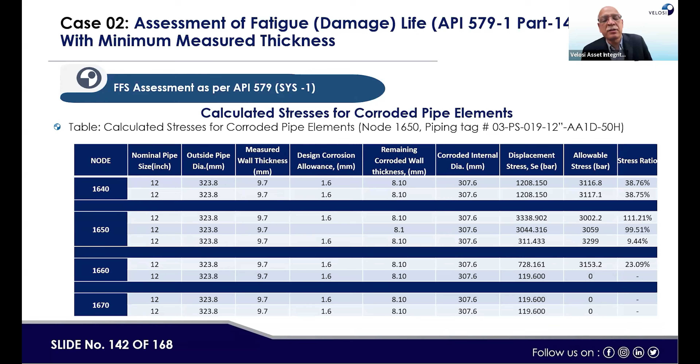The answer is coming, yes, mostly right. It is as per part 14. Thanks for the correct answer.

Now, fatigue life assessment of corroded piping elements and remaining life calculations. Because most of the work is done by Caesar II—we made the model, we put the conditions, we made the load cases, and the results are being presented—this becomes a gray area in between, because Caesar II software is doing this fatigue analysis, and that cannot be demonstrated because the calculations are all behind the scenes.

So, fatigue life assessment for the corroded piping element and remaining life calculations: based on displacement stress calculated in the previous section, the fatigue life of the corroded component is calculated as per API 579.

The material fatigue curves are taken from API 579 Annex 14B, ASME Section VIII, division 2, for fatigue life assessment of corroded piping elements. Piping tags considered are 03PS44 and 03PS019. Based on the displacement stresses calculated in the previous section, the fatigue life of the corroded pipe component is calculated as per API 579 division 2. These are the two tags.

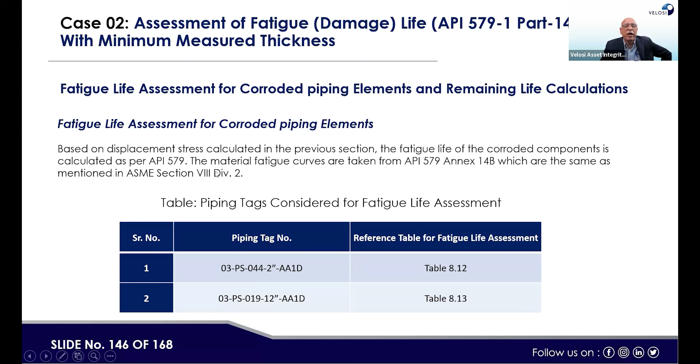Now, looking at the number of cycles, this shows how many cycles this piping tag can sustain - that is basically the key result of the assessment. Here you can see this piping system can withhold an infinite number of cycles.

But for this piping tag, 40,000 cycles. This one, 67,000 cycles. These numbers tell us how many cycles are required - 13,739 here. From the table below, it is seen that most of the assessment nodes still have fatigue life. However, per node 7010, thermal fatigue is the controlling factor under fully corroded condition, with 13,739 thermal cycles allowed. All other places have more cycles.

So this is basically a calculation result - the fatigue life assessment result for corroded piping element at node 605, piping tag number, this is a limiting component. Similarly here, the most assessment nodes still have long fatigue life, and the thermal fatigue life for node 1650 - this is the limiting site.

The fatigue life assessment result of the corroded pipe element number here is 36,000 - that is the lowest number coming there.

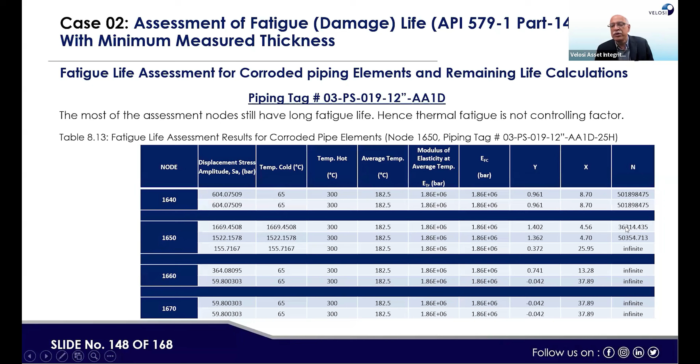Now we are reaching toward the conclusion of our presentation - the fatigue life assessment for corroded piping element remaining life calculation. The fatigue life is an accumulative damage result. The fatigue life calculated for piping tags for virgin material with corroded thickness, since the piping of interest was put in service since 1990, has been in service for 29 years.

The accumulated cycles are 13,760, assuming 29 years of continuous operational life and 1.3 cycles per day. To calculate the damage for these cycles, assuming fatigue damage accumulation with different stress ranges using Miner's rule, and with calculated corrosion rate held constant throughout the service, the damage in the past operation can be calculated. The calculations are shown in this equation.

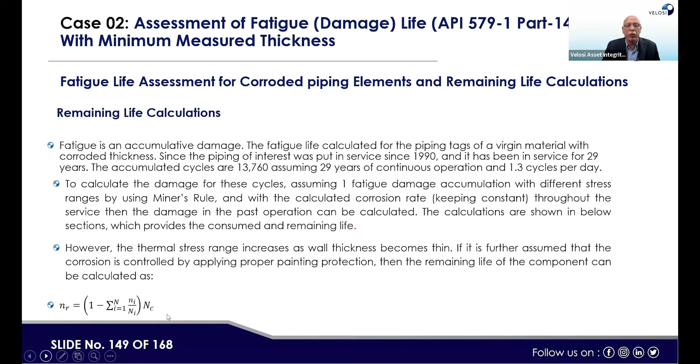However, the thermal stress range increases as wall thickness becomes thin. If it is further assumed that corrosion is controlled by applying proper painting and protection, then the remaining life of the component can be considered as per this number of cycle equation.

So here, the fatigue life assessment for corroded piping element and remaining life calculation for this piping tag number - according to the inspection report year 2021, the minimum measured thickness is 3.82 mm at this node number, and nominal thickness is this. The full length replacement was done in that period.

Now the line is fit for service till year 2038. However, it should be noted that these cycles are calculated based on the current corrosion rate. If the corrosion rate increased, then additional assessment would be required. Here, this is the fatigue life - the number of cycles calculated for this piping tag by Caesar 2. So this is the next tag calculation.

Similar results are presented. This also shows the number of cycles and fatigue life for tag number 2, which is node number 2. If you see that, all code stresses of the corroded component are calculated within the code allowable stress except at node 605 and 7010.

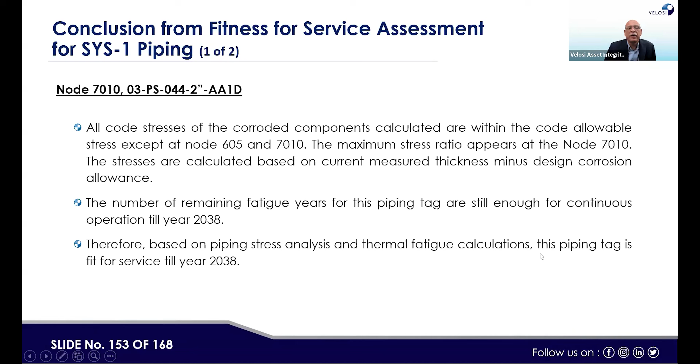The maximum stress ratio appears at node 7010. These stresses are calculated based on the current measured thickness minus design corrosion allowance. The number of remaining fatigue years for the piping tag are still enough for continuous service till year 2038. Therefore, based on piping stress analysis and thermal fatigue calculation, this piping tag is fit for service till year 2038.

Similar presentation for the other tag. Here if you see, all these piping tags where the life is the design case, fatigue case - the results are all acceptable till 2038.

So the conclusion and recommendation is the last part. The piping shows the highest stress, 98.7%, but was replaced in year 2009 and is safe for operation till 2038 based on the remaining cycle analysis. Annual monitoring for vibration, crack initiation, and thickness reduction is recommended as per the RBI plan.

Then the piping shows high stress - this other one, tag number 0019, at 89.5%, but was partially replaced during year 2017 turnaround and is safe for operation until 2038.

The same kind of recommendation is there. In piping, the piping is overstressed at one tag, at node 460. However, due to minimum thickness loss and 3.5 safety factor, it can operate safely until 2038, and the routing is inflexible and causes high stresses.

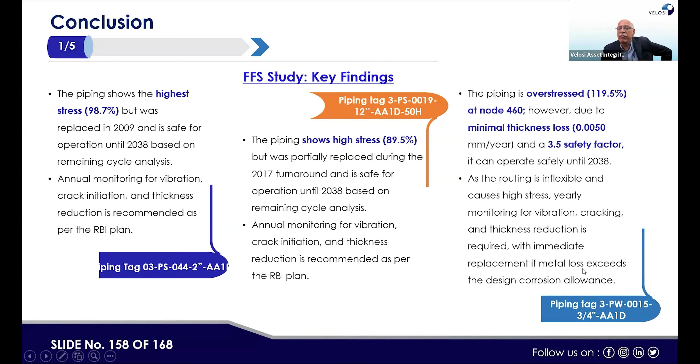Yearly monitoring for vibration, cracking, and thickness reduction is required, with immediate replacement if metal loss exceeds the design limit. So these are the areas where recommendations are there, where some modification is required, some problem is there.

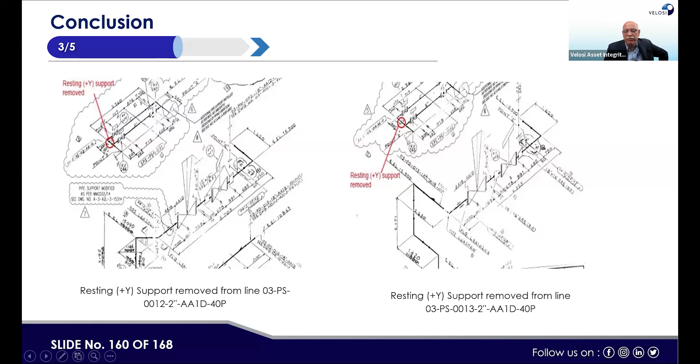So this is the location shown, like a resting support removed from this line number, resting support removed from this pipe number, so as to get some more flexibility. This is the modified resting support with 0.1 friction factor, and resting plus Y support removed from the line to show some flexibility.

So the final recommendations: it is recommended to apply corrosion preventive coating to areas where CUI is observed for the piping. For the inlet piping, a regular piping inspection program as per API 570 is sufficient for future maintenance, provided that the prevention of future CUI is addressed.

Then piping tags referred with high stress should be monitored closely. If any crack-like flaws appear, consideration could be given to replacement of these pipe tags with better flexible design and modified supports.

The remaining wall thickness of the pipes and associated remaining corrosion allowance are the key factors in the assessment of future fatigue life. Therefore, future thickness monitoring and vibration monitoring of the overstressed pipes are to be followed. It is also recommended that thorough inspection be performed in the next shutdown, as it will ensure the actual condition of the piping systems.

So it concludes the presentation.

Now we have two questions which you people will be asked to answer, and then we will go for an open question and answer session. So here, which software is used for fatigue analysis of this piping system, what we discussed? Just to make sure you are familiar with at least what software we used. We are not promoting Hexagon, but the software we use, which you people can remember.

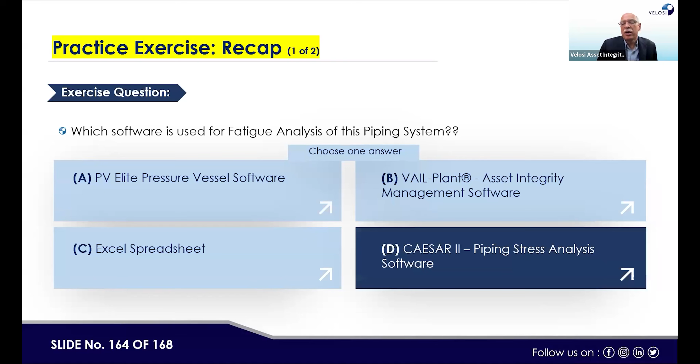Answer coming, all correct. It's D, CAESAR II, basically Hexagon CAESAR II piping stress analysis software, for fatigue analysis.

Now, one more question, which is the last one. How many parts are there in API 579, including introduction? So, answer coming for this question, like how many parts are there in API 579? At least we should remember that now, we studied it in the beginning.

Answer coming? Yes, answer is C, 14.

So we completed our discussion. Now we'll take some live questions. We hope that this session was useful and you have obtained some knowledge about API 579, some knowledge about cyclic service, and how we can do finite element analysis or CAESAR II analysis for thermal fatigue piping systems. We are seeing some participants raising their hands, but we have already received some questions in the Q&A panel, so we'll go with them first.

So we will start with Mr. Dawood Ali Nadaf. Mr. Dawood Ali, we have allowed you to talk, please unmute your mic and ask your question. I think, Mr. Dawood Ali, your mic is not properly working. So anyway, we will... you can read the question.

If multiple damages are identified, like metal loss and crack, then FFS is considered and performed in a separate calculation. That's one question. What are the criteria to decide whether it is a short or long-term corrosion rate? These are the two questions.

So here, if you see, we have assessed multiple damage mechanisms. There are three damage mechanisms we assessed in this particular case: one is fatigue, thermal fatigue due to thermal cycles; second was CUI, corrosion under insulation; and third was also general corrosion. So it means we can assess 3 or 4 damage mechanisms in one go if they are causing a similar kind of issue.